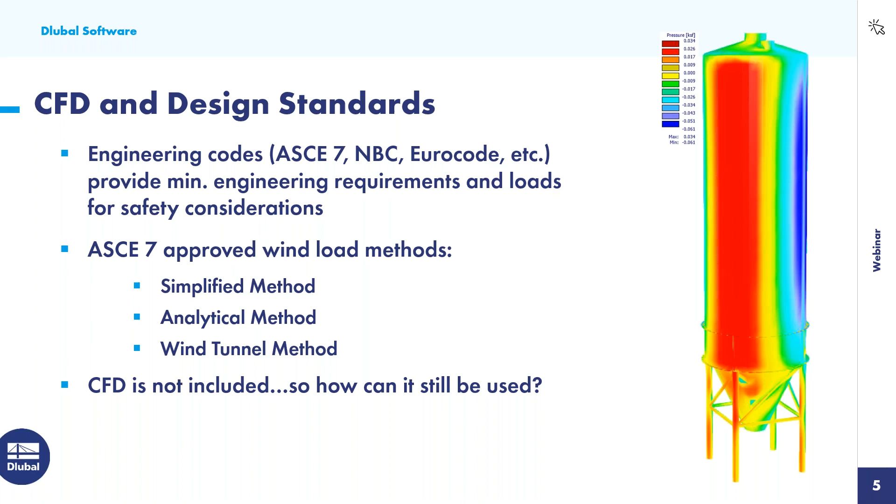So we might be wondering, how can it still be used while abiding by the standard? On this next slide, I want to lay out a few benefits and advantages we find when carrying out a CFD analysis. Essentially, a program like RWIND is a very cost-effective engineering tool for many useful applications. I put a lot of emphasis on the word 'tool' here because we're by no means suggesting this program should take the place of the requirements within the standard.

So how can we use this in addition to the standard? We know codes such as the ASCE 7 and NBC only provide minimum wind loads. It could be that in certain scenarios we need to increase these loads due to special cases, primarily for complex structural shapes. We can also use CFD for structures that fall completely outside the standard with no minimum guidelines to follow. The code is certainly very clear on many types of structures, but when we get outside these provisions, we're making a lot of guesses and assumptions. So we can use CFD to ensure those guesses and assumptions are correct.

We can assess the varying wind loads very early on in the design process. We can simply take our structure, put it in this numerical wind tunnel, and adjust that design again very early on based on these applied wind loads.

A program like RWIND can also consider the surrounding terrain and object consideration. So if we have very complex hills or adjacent buildings, which is what we'll take a look at today, these are all going to affect the wind flow. Now, there are certain coefficients within the standard, but these are all generalized, so if we wanted a more in-depth study of wind analysis, we could do so. We can also determine occupant comfort with the applied wind loads—looking at our structure, what it's going to be used for, and whether occupants inside will be comfortable with these wind loads.

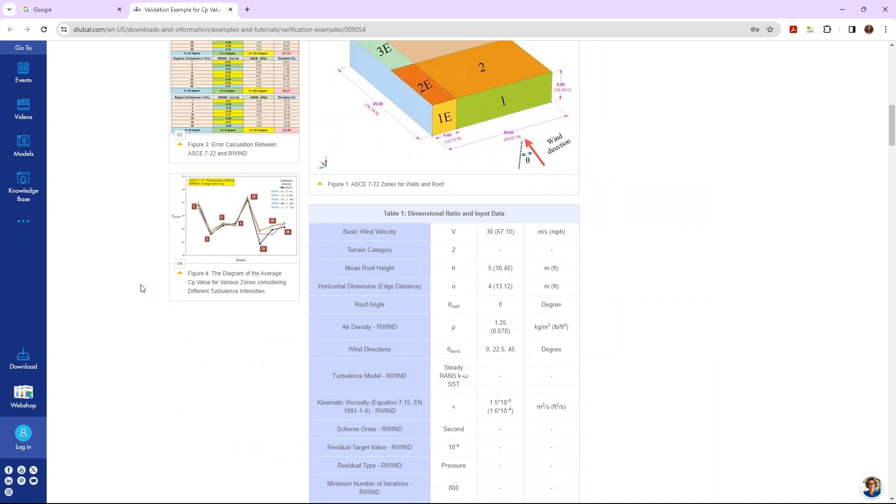The first example, if we click on it, compares the ASCE 7-2022 standard with RWIND for a general box type structure. We thought it might be interesting to compare these two to see how the RWIND results match up to the code standard. You can see the output and the deviation within this table as well as in graphical format.

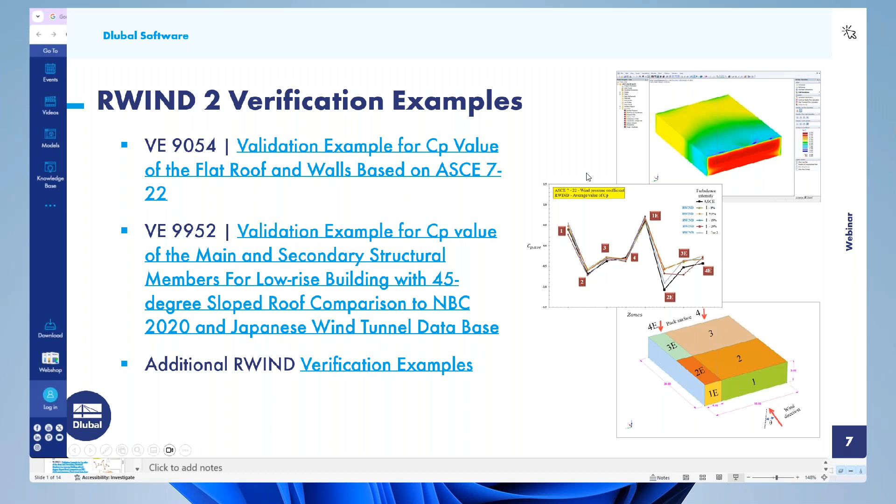In a similar manner, we also have a verification example with the NBC 2020. Taking a look at this particular example on our website, you'll notice this is for a dual pitch roof. We're also comparing the analytical calculations from the NBC to our RWIND, but this one was also carried out in a true wind tunnel test in Japan.

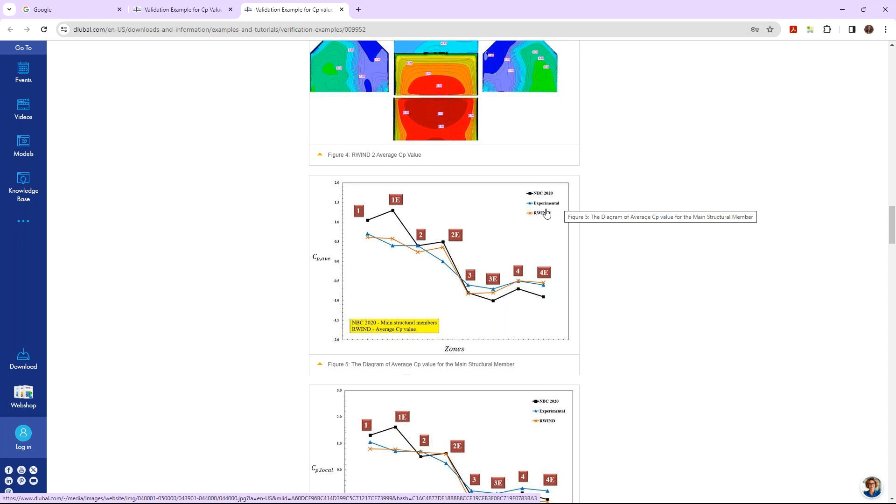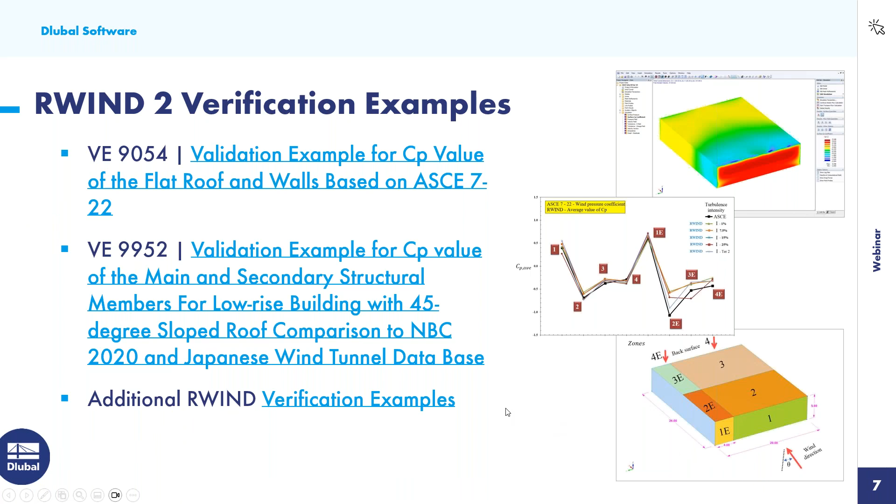So with this verification example, if we scroll down, we will see those three methods compared in graphical format: the NBC 2020, the experimental wind tunnel, and RWIND. We have many more verification examples available on our website, comparing to Eurocode as well as other analytical calculations, which you can access with this third link.

We're only going to be focusing on the steady flow for today's presentation, but if you are interested in the transient flow, I did carry this out in a previous RWIND 2 webinar that you can find on our website and our YouTube channel.

Now we'll take a look at several of the new features that we have released within RWIND 2 in the past several versions. And I'll preface that each one of these features here we'll actually be looking at in our example today. So we'll begin with the wind tunnel size. We offer now new scaling options.

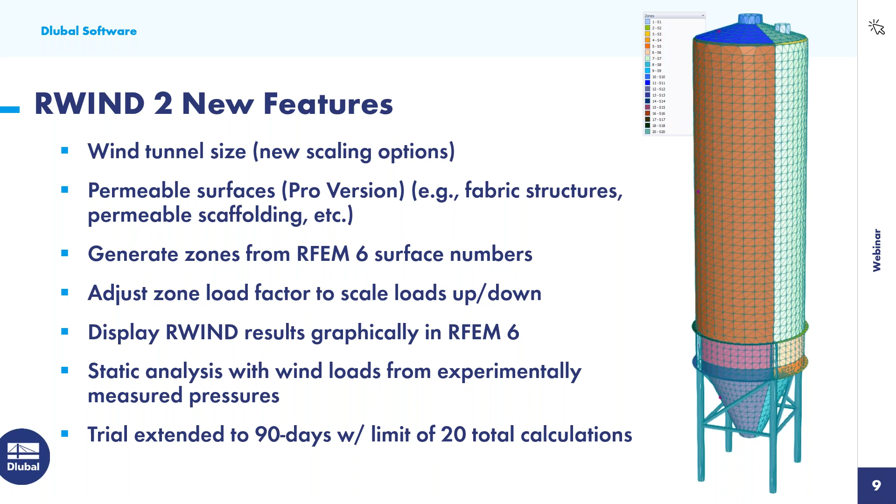Okay, so let us begin in our FEA program, RFEM here. And we can use RWIND as a standalone program. So I do want to make note of that, but for today's presentation, we will be integrating the structure into RWIND and then integrating those wind loads back into RFEM.

For those of you who have joined us for webinars before, this structure may look familiar. I did a previous webinar on the silo structure design where I fully modeled this structure. I carried out the analysis and the design of the members according to AISC, as well as a general stress design for our surfaces. So we won't get into that portion today. We're only going to focus on the wind analysis, but you can certainly take a look at that webinar if you are interested in that.

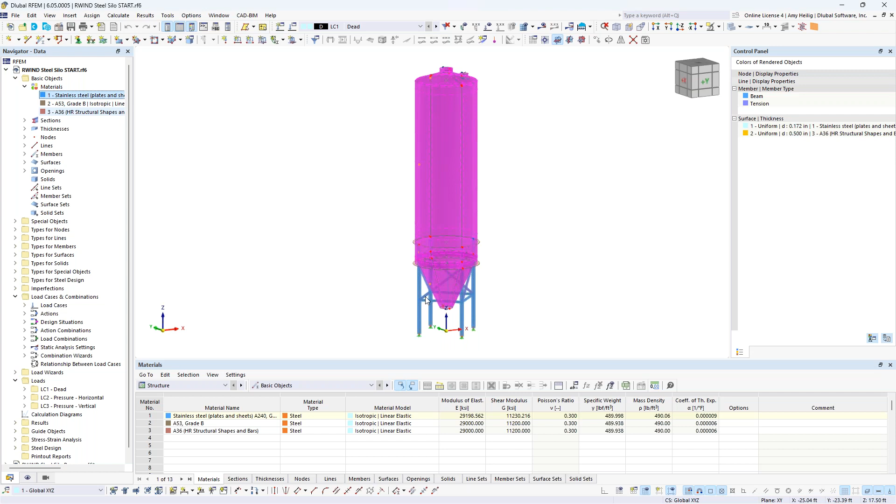So let's take a look at a quick model review though. So going to our navigator here, we have our silo structure, and you can see these surfaces are defined here with stainless steel. We also have A53 grade B pipe members supporting the structure at the bottom. And then we have a couple ring beams, A36 material, as well as these channel sections spanning in between the ring beams.

Now, in the previous webinar as well, I had also applied various loads. So we have 3 simple load cases for today. The dead load is only going to include the self-weight, so no additional loads applied here. However, if we take a look at the pressure in the horizontal direction, we want to account for some type of fill load inside of this silo structure. So you can see that outward pressure along the body of the silo up here close to the top, but not quite to it. And then as well as in the hopper, we also have a friction load here for, again, that fill. So it's going to be in the downward direction along the full height of the hopper as well as the full height of the silo.

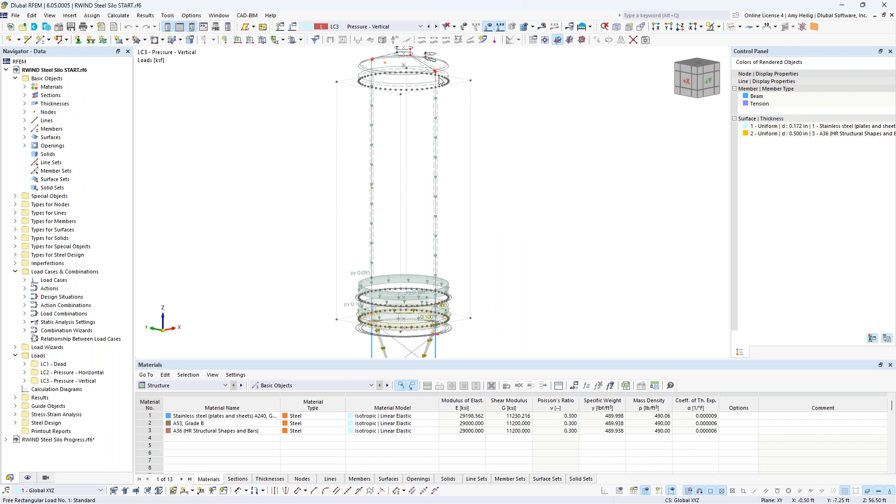So now we want to begin with our wind load. And when we go to the base data, which we could right click on the model name to access that dialog box here, or we could access it within our quick tools. This would be the dialog box that pops up when we first create our model.

But we can revisit it here under the second tab to take a look at all of the various add-ons available. So again, for those of you not familiar with RFEM, we do work with this add-on concept in the sense that RFEM is the base FEA program that provides the modeling, BIM integration, and the full analysis. But if we want to take it a step further and carry out the steel design according to AISC or concrete design and so on, or advanced analysis like dynamics or stability, we would need these add-ons. So you create the package that's specific for your design needs.

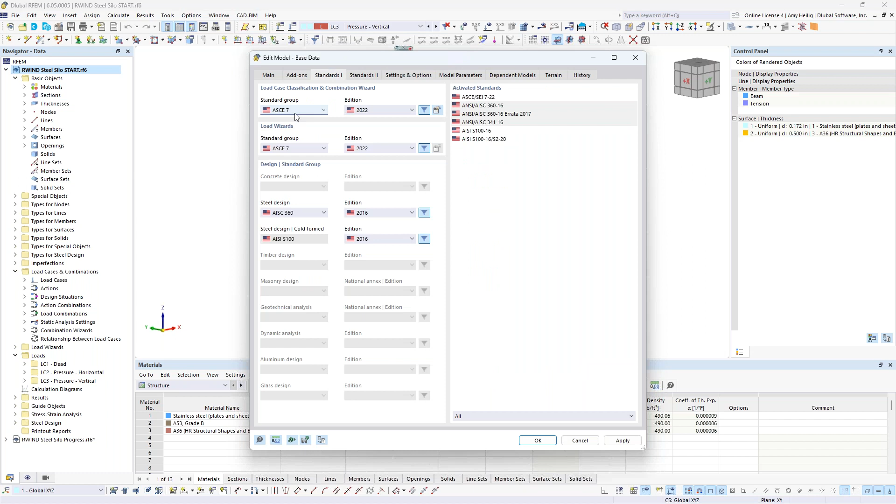But you'll notice here that we also have wind simulation. So this is telling the program that we now want to integrate this model with the standalone program RWIND. Under the third tab, we will generate our load combinations automatically according to the ASCE 7, the 2022 standard, but more importantly, specific to our wind. We will generate our wind load profile according to the ASCE 7; the 2022 standard is available. We also have the NBC 2020 standard available, as well as many other international codes here.

Now, if we want to carry out the steel design, again, we won't be getting into that today, but the AISC 360 is available, or the AISI standard. 2016 is currently released in this version, but we do plan to release the 2022 in the next few weeks.

So once we have this information input, we want to go into our load cases and combinations, and we will generate our first wind load case here, load case number 4. And we'll give this the name wind with the action category set to wind load based on the ASCE 7. Now I could manually apply my wind loads here to the structure, and in that case I would keep the analysis type set as static, but because we have enabled our wind, we now have the wind simulation option available. And this gives us 2 additional tabs here up at the top.

So moving to the second tab, we want to input the wind simulation analysis settings. This is what is going to be used in RWIND, but we have the ability to set this here within RFEM. So we do have a default definition set that we can simply modify, or we can create multiple definition types with the option down here in the lower left. The simulation type is going to be set to steady flow. Again, we covered this in the PowerPoint that if you do have access to the Pro version, you can also run the transient flow.

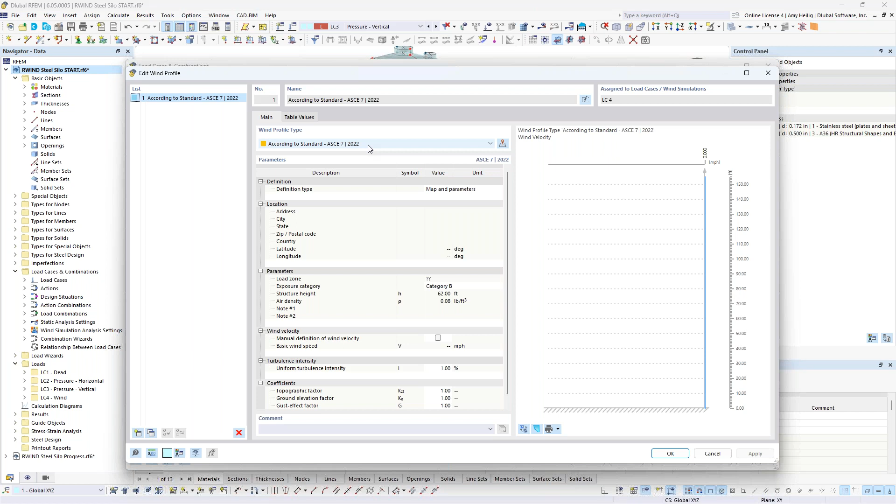Now, the additional tabs, such as the advanced, you're probably not going to make too many changes here unless you're an advanced CFD user. So once we have this input, we now move on to the wind profile. So what is the wind speed entering into this numerical wind tunnel? And you can see once again that we do have a default option set here according to the ASCE 7-22, because that is what we set in our base data. Alternatively, we can use this option here for user defined. So no longer are we referencing a specific code, but you can manually input the wind velocity here as a function of the tunnel height, including the turbulence intensity.

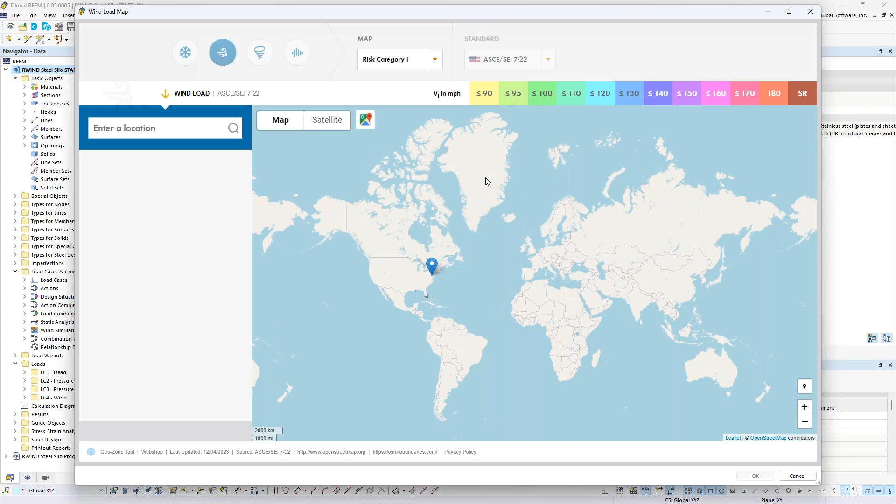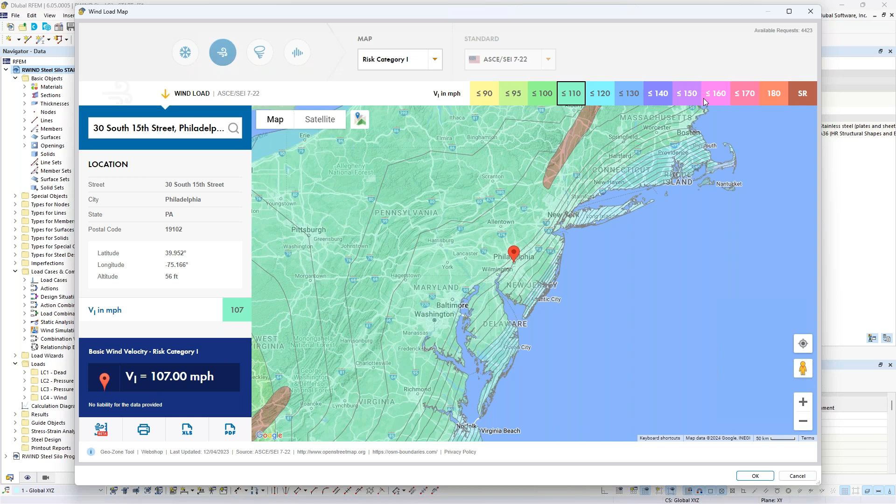So we'll go ahead and use the ASCE 7 for our example today, and then we have two additional options here, including the map and parameters. What this allows us to do is to access what we call our Geo-Zone Tool, which is available on the Dlubal website, where we have taken multiple standards all over the world and integrated them with Google Maps technology. So specific to the ASCE 7 here, we would select our risk category. We could toggle here to Google Maps directly, and we could input the direct address, or we could click on the map. So just choosing here the address of our Philadelphia office, and we can zoom in here. We can see that the ASCE 7 has set this basic wind velocity for risk category 1 at 107 miles per hour. We can click OK, and all of the location and the wind velocity will directly be imported for this wind profile.

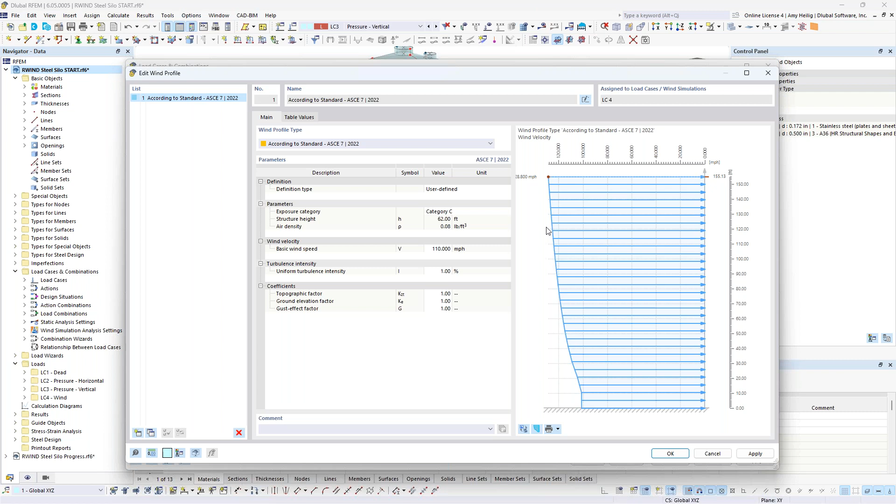Now, alternatively, we can choose the user defined, where we just simply type in, let's say, a basic wind speed of 110 miles per hour. Now we can make modifications to the exposure categories, such as C. We also have additional information that we need to input, such as the turbulence intensity, but also these factors that are specific to the ASCE 7 that are all going to affect the wind velocity here at the start of the wind tunnel. So now we see as a function of height and miles per hour what that wind speed will be. I can toggle here, and we can see a better view of exactly the information that we're setting here.

So now that we've input this information, we also can input the wind direction. And this is all based on the global x-axis. So if we have this set to 0 degrees, the wind flow is going to move from left to right here on the structure, in the positive x-axis.

Now we'll get to a little bit later on some alternative options here. We'll also discuss the experimental data at the end of our presentation today. So finally, we have our wind tunnel. Again, the program has optimized these. We do have the ability here in RFEM to manually adjust these individual inputs for the wind tunnel size.

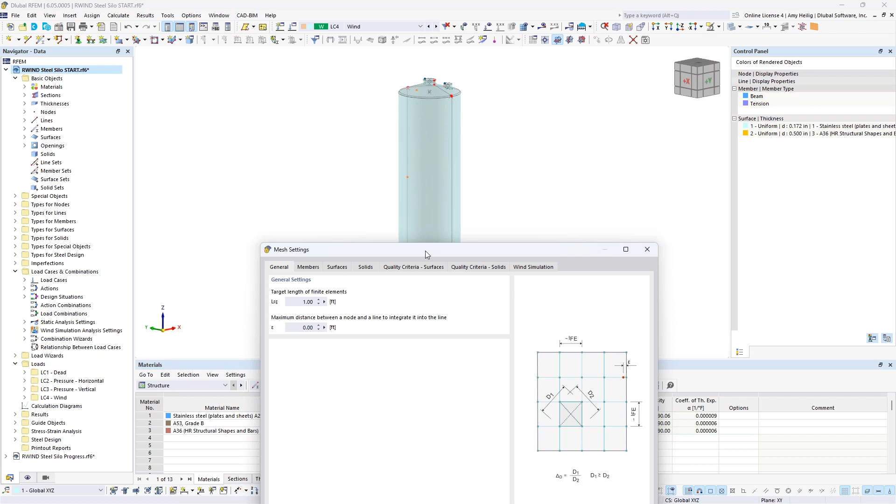Now, before we are able to run this within RWIND, we do want to take care of one more additional setting under Calculate Mesh Settings. So this is typically where we would input our information for our FE finite element length within RFEM itself, and some additional options here. But we also have a wind simulation tab and some additional options here that are specific to what we call our shrink wrap mesh that is always needed with this CFD analysis.

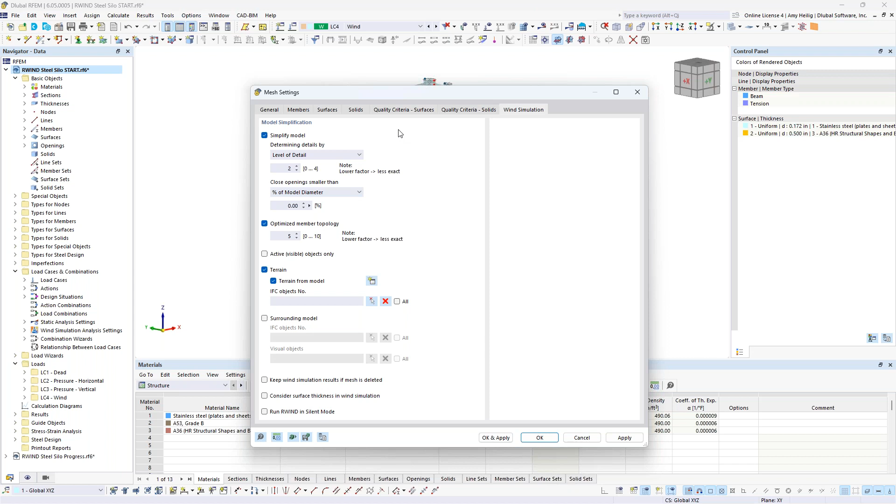And I'll show you that once we get into RWIND, but these specific settings here are going to control that shrink wrap mesh, including the level of detail. So a scale of 0 to 4, the higher we set this, the more detail we will take into consideration. What this means is, do we want this shrink wrap mesh to take into account every single little geometric detail here of our structure, or do we want to simplify? So this is set by default to 2.

We can also close openings. So we can essentially not allow wind to flow through certain areas of our model. So down here at the bottom, we certainly want the wind flow to move through these areas, but I could close them if I prefer. What would probably make a bit more sense with this is something like open doors or open windows. We can use that shrink wrap mesh to close those openings so that wind flow is not allowed to move through the interior of the structure.

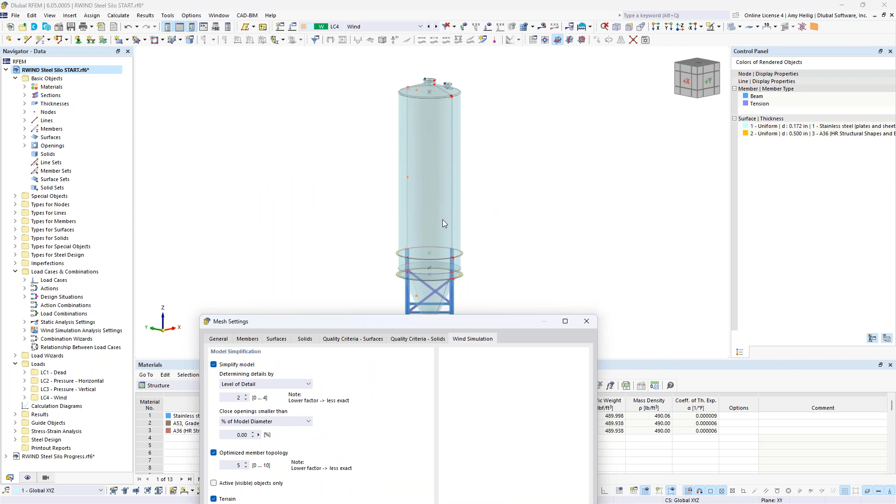It should be known though that if you choose to close these openings, the shrink wrap mesh in RWIND is not going to distribute those loads to the adjacent elements. If you do want to take that into consideration, you should apply another surface element in RFEM. For example, we have a surface load transfer that's purely used as a surface element to transfer loads to adjacent objects without adding any stiffness. So plenty of resources on that in previous webinars and on our website.

The optimized member topology, for example, if we have a W section, do we want this shrink wrap mesh to account for all of the flanges, the webs, that geometry exactly, or do we want to simplify a bit further with more of a box type structure? So again, the default here is set to something kind of middle of that scale.

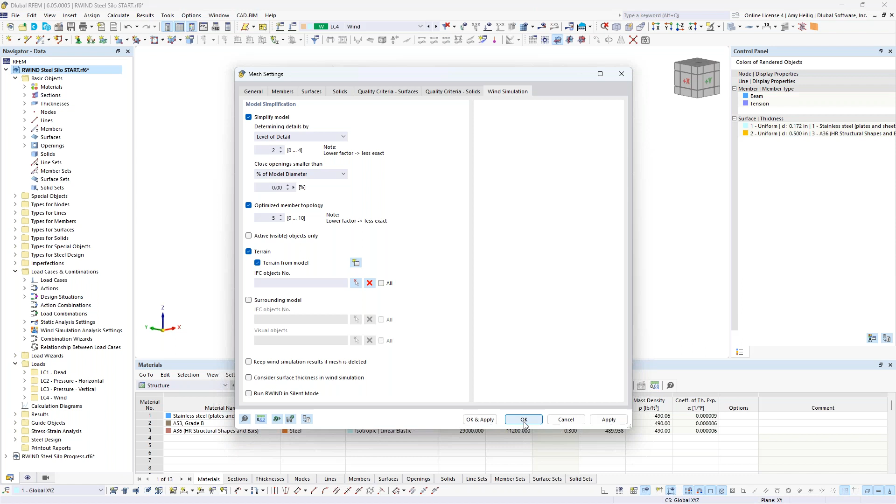Down here, the keep wind simulation results if mesh is deleted. This is really helpful in the sense that if we make very minor changes to our RFEM model and the mesh here in this program deletes, we won't necessarily lose our RWIND results that could take several minutes depending on the complexity of the structure to run. If you make any major changes, though, you should use this option quite carefully, in the sense that with any geometry changes, the wind analysis should probably be rerun. So just keep that into consideration, but when we're swapping out materials or something, this can certainly be a useful feature.

Okay, so now that we have all of this information input, we can go to calculate and we can open up RWIND directly here. So notice that the program is going to calculate the FE mesh in RFEM, and that's because our shrink wrap mesh, once we get into RWIND, does correspond with the FE mesh in RFEM so that we can bring back those wind loads and apply them to the structure here in RFEM for the static analysis and design.

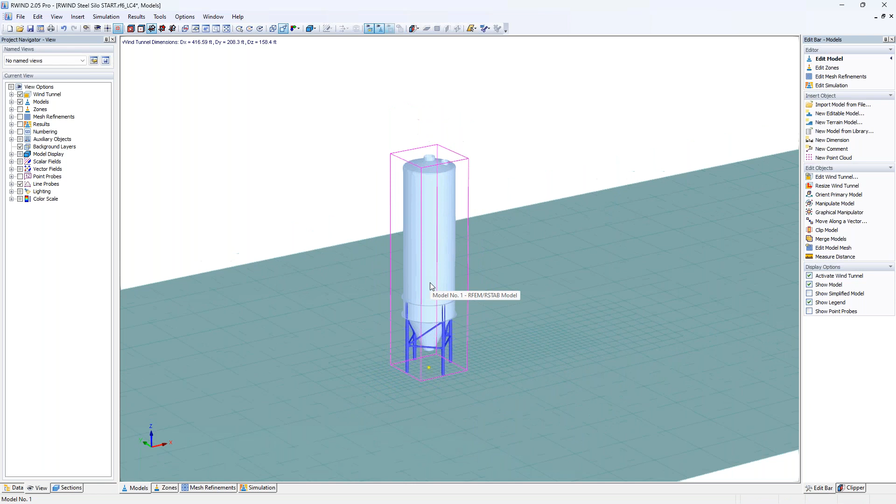Okay, so once this program launches here, what we should see is our silo structure brought into this numerical wind tunnel. So we'll cover a little bit of the input here first before we run the calculation. So sure enough, here is my silo structure. Again, only the geometry is needed. It's brought into this numerical wind tunnel. We're not really caring much about materials and stiffnesses.

You'll also notice in the wind tunnel itself, as I mentioned, that mesh density, it's pretty coarse out here, but as we move closer to the structure, it's a bit more refined. And this is essentially the mesh that's occurring throughout the length, the width, the height of this tunnel.

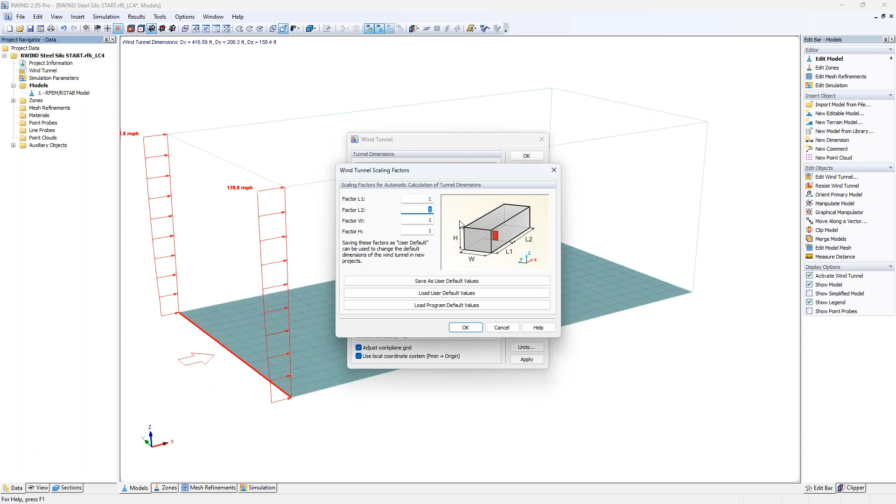Now we talked about the new scaling options for this wind tunnel. So here in our navigator tab, we can double click this wind tunnel and we have added this scaling factors option here. So now, for example, if we know our model is not converging with the simulation, we need to add some additional length within our wind tunnel behind the structure, which would be L2. We can add a factor directly in here, such as 2.0.

So when I click OK, the program gives me a warning saying I must also click the Adjust Automatically button. So we do so here, considering the model standing on the ground. And when we click OK, we should now see that wind tunnel extended by a factor of 2. So this allows us to quickly make changes to that wind tunnel rather than manually adjusting each input individually. We'll go ahead and click the Undo button. We want to keep that wind tunnel as the default size.

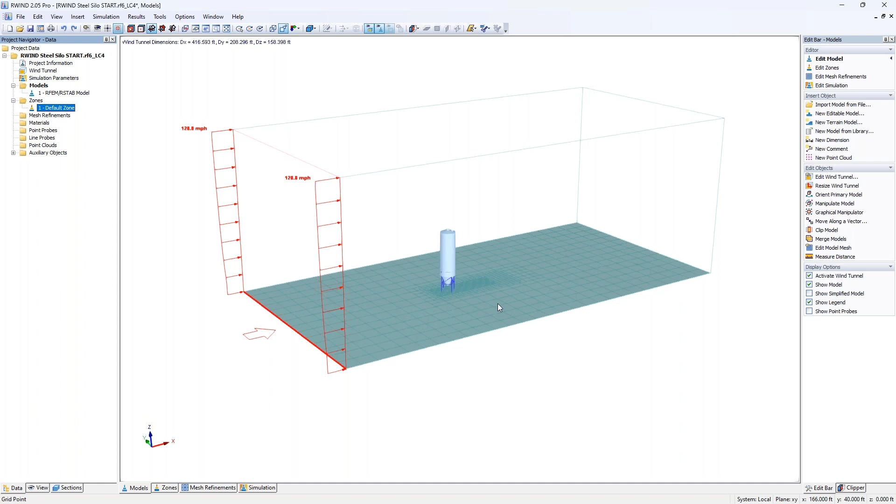You'll also notice that wind profile that we have set according to the ASCE 7 is shown here along with the magnitude, and that wind flow will move from left to right. So we also talked about in the PowerPoint the option for zones. So currently under the zones, we just have one option, and that's the default zone, which is going to include this entire model. Now, previously, if we go here to this second tab and I zoom in, we used to have to create these zones manually within RWIND itself.

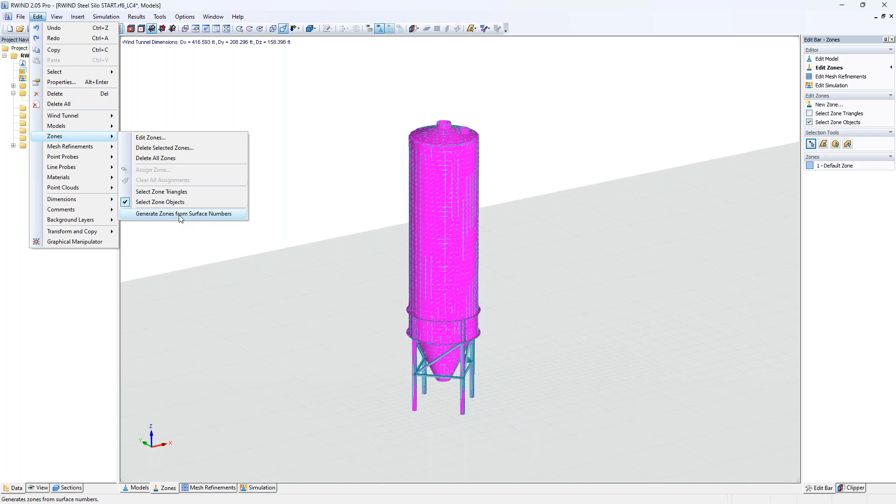So now under the option edit, and we have here zones, we can generate the zones from the RFEM surface numbers automatically. So notice now all of these zones have been created here, and I can toggle through them, and I'll actually also turn off here the mesh edges so you can see this a little bit more clearly. But every single zone is going to correspond with the surface number that we have set within RFEM itself. So ultimately, obviously, this is used to subdivide the model into parts, but also to assign specific input properties.

So for example, graphically, I can choose one of these zones here, double click on it, and we can assign a new material. So when I create a new material definition type, I can apply those surface roughness input options here. We previously saw this option in RFEM as well, but it was applied to all surfaces. But now that we're within our RWIND, we can apply different surface roughnesses to each individual zone or surface.

Additionally, if you have that Pro version, you can consider the surface permeability. So we have the Darcy coefficient, inertial coefficient, and the porous media length to allow some of that wind flow to pass through the surface. Now, also after we are done, we will also use these zones for result interpretation like drag forces.

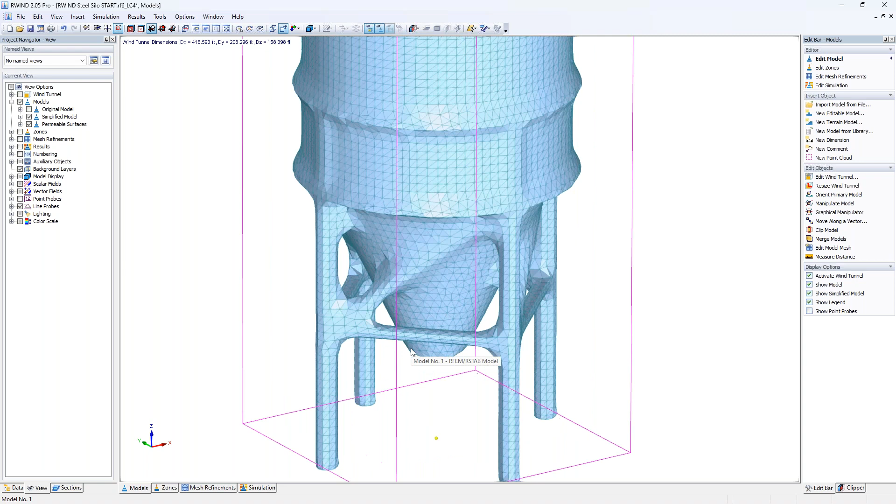Going back to the model here, I also would like to take a look at this shrink wrap mesh. So we'll go ahead and activate it here under the simplified model. I'll turn off my wind tunnel, and zooming in here, you can see that again, the program has created this shrink wrap mesh automatically for us. And this is truly the huge advantage of our RWIND, is that when you're carrying out a CFD analysis, it is required that you have this shrink wrap mesh, and ultimately it can be really time consuming to create this simplified model from our more complex RFEM model. But the program is doing all of this automatically for us. And again, it's needed in that CFD calculation with that OpenFOAM solver.

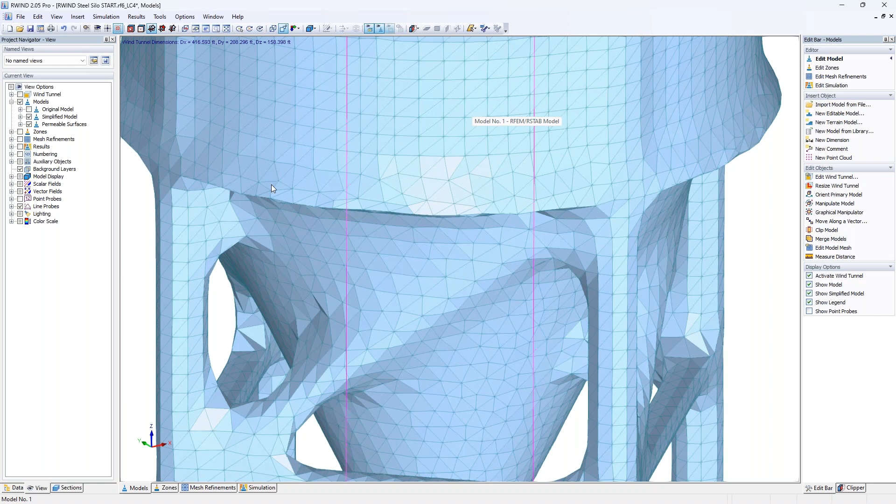It's also correcting any mesh errors automatically. So you'll notice that if we zoom in here, we have triangles everywhere that have to intersect perfectly with the adjacent triangle. So the program has taken care of all of that for us. It has closed a lot of these open edges. It also has deleted or simplified any unnecessary detail. Now, again, this all depends on those settings that we set back in RFEM, or we can control them here in our RWIND. You can see that there's certainly some simplifications going on here, but again, that's going to speed up our calculation time a bit rather than waiting longer with taking into account more of those details.

So we are now ready to run the calculation, but rather than waiting for this to run, I'm going to go ahead and open up an already saved model. So when we run the RWIND calculation, we would jump to the simulation tab here, and the run calculation option would be available.

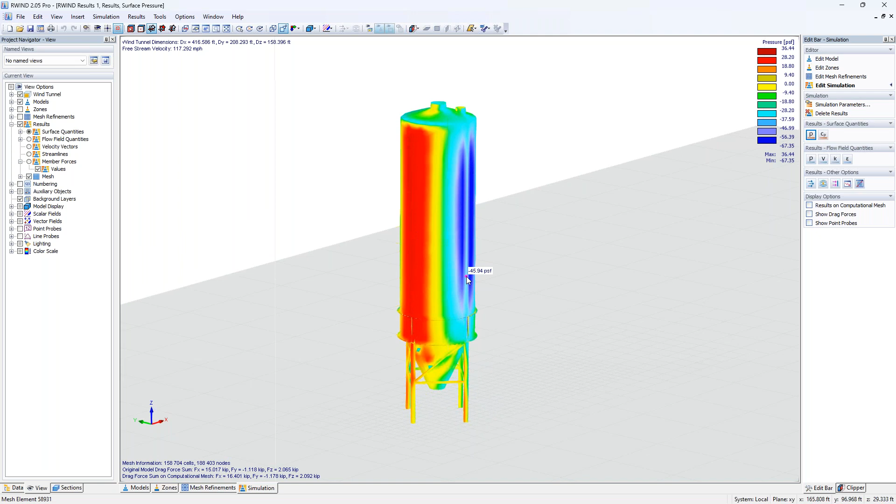Once it's done, we're now presented with our results here within RWIND. We're initially presented with the surface pressures. Viewing the surface pressures, we can move our mouse around and see the magnitude directly given, with pressure acting perpendicular to the surfaces. When we rotate this around, we may see higher suction forces denoted by a negative value.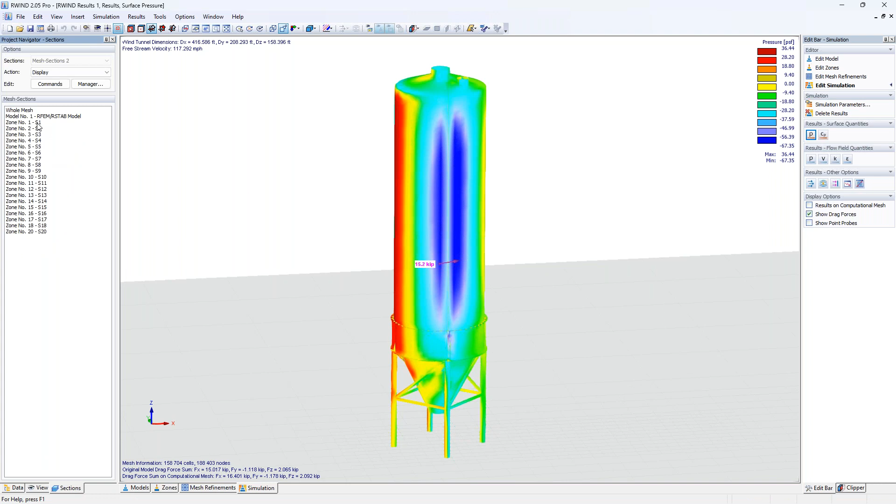We can also activate the drag forces. So the drag force total for the RFEM model is shown at 15.2 kips, and we can see this shown graphically here. But under these sections, this is where we can also take advantage of those zones. So notice zone number 1, which is my members only, this drag force updates to show me only the forces for these relevant sections.

Now we could continue with some of these various zones, but perhaps I'm interested in both zone 7, and holding down my control key, zone 16 for the body of the silo structure, and I see my total drag force here as 10.6 kips. Okay, so we'll turn off those drag forces and go back to the full member model here for the pressure.

We can also take a look at the pressure coefficient factors, and these represent the relationship between the static pressure and the stagnation pressure. So again, these contours shouldn't change from our pressure, but our magnitudes here certainly will.

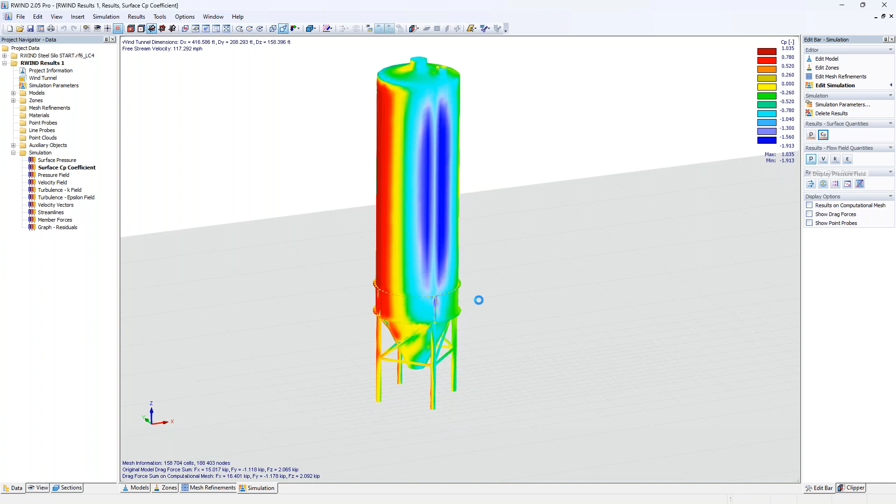We then can view the pressure in and around the structure. When we look at this option, you'll notice we have this slicer directly through the wind tunnel. Under this clipper tab, we can change maybe in the X direction or any of the other planes available. We can also slide it from left to right to see those wind pressures changing, and use our mouse to view those magnitudes around the structure itself.

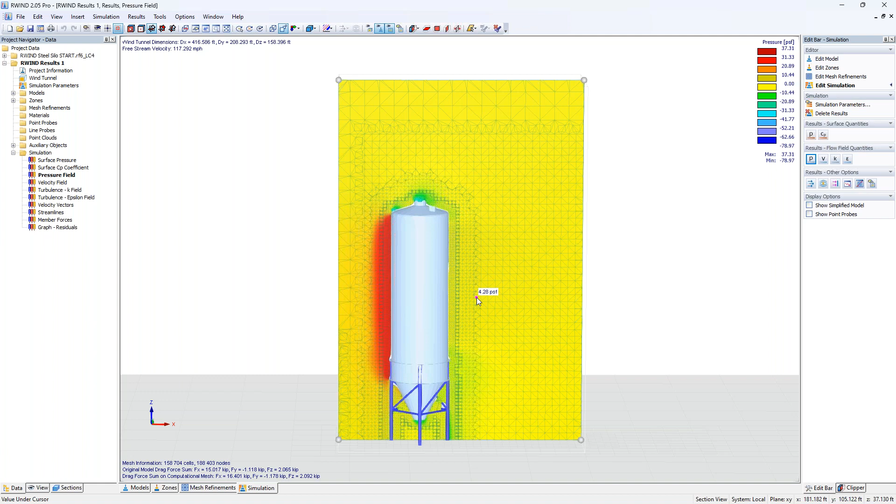Same concept here for the velocity field. We can actually view the wind flow velocity in miles per hour in and around the structure. Then we have two additional options related to turbulence. The first option shows the turbulence with respect to kinetic energy, again showing the magnitudes here. Our epsilon shows the results of the turbulent energy dissipation.

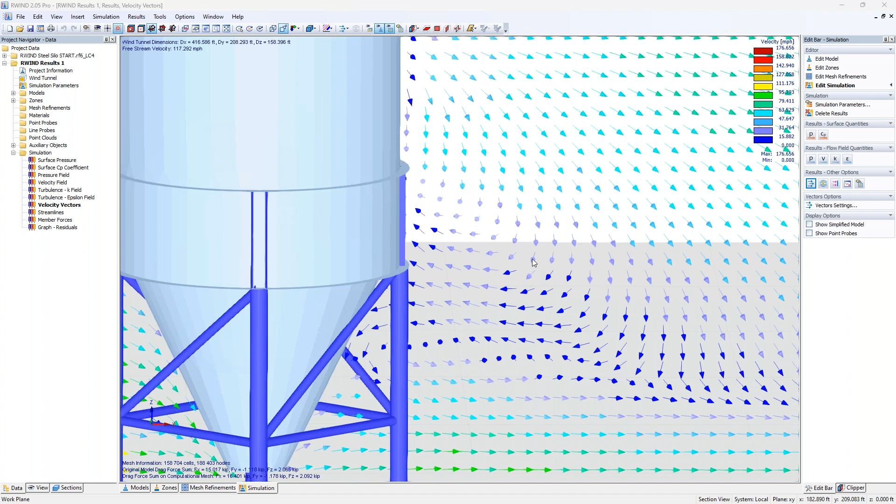So moving on to the additional options under other options, we have our velocity vectors. This allows me to zoom in and actually see the magnitude and direction of these velocity vectors and how they'll essentially affect the structure. We can see how the velocity is either moving toward a structure or when we have that particular suction force.

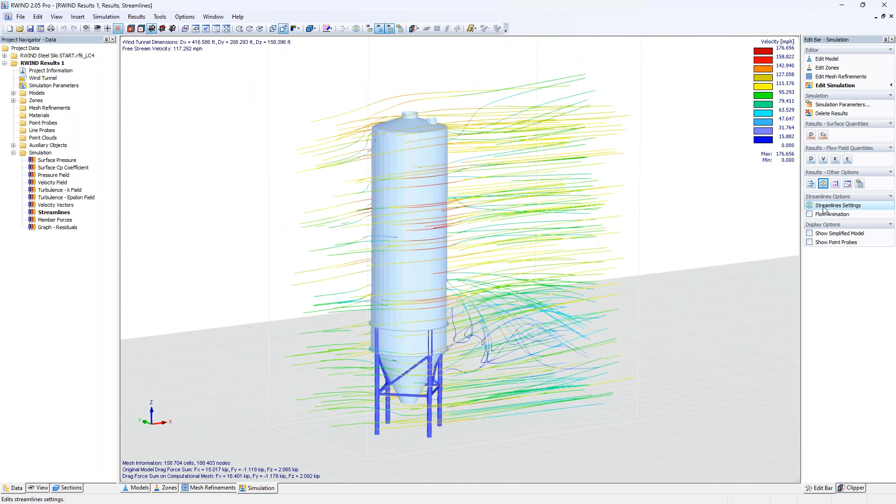And finally, we have our streamlines. This shows the particles that allow me to study the airflow as it moves through this tunnel, and we can adjust the streamline settings here. Under the drop down at the top, we can change this to a segment, to a rectangle, or currently we have it set to a 3D box.

Additionally, we can rotate this around and graphically make modifications to the size of our 3D box. If we wanted to set that to something more narrow, we could rotate it. Once we click OK, this will adjust those particles and we can activate the flow animation, which is helpful in studying those airflow particles as they move around our structure.

Under tools, we can create a video file, so you can save this MP4 file to your computer. Again, this is something that could be really beneficial in something like a digital calculation package that you're submitting to your client.

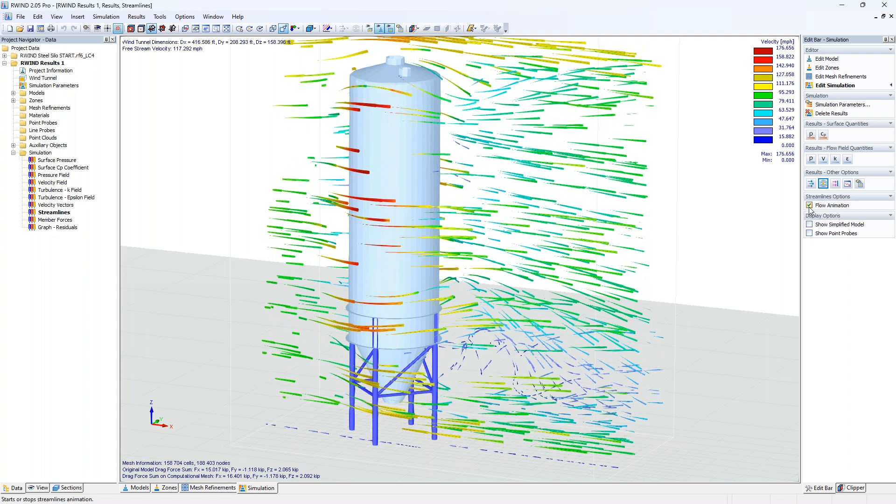Okay, so moving back to the pressure, we also have the option called point probes. When I right click here to add in a new point probe, I can set these graphically and click on various areas of my model here, including the members or maybe the backside to see these suction values.

You'll notice that when I set these point probes, they are now stationary. This allows me to view the pressures at particular points, or I can toggle to the pressure coefficients. Again, those magnitudes will change, but these point probes are always available within the model. We can turn them on or off with this checkbox shown on the right. In a similar manner, we also have what we call line probes.

So I can right click here to create a new line probe. But if I try and set this graphically, the program gives a warning saying it can't be set graphically, and to please use this alternative tool.

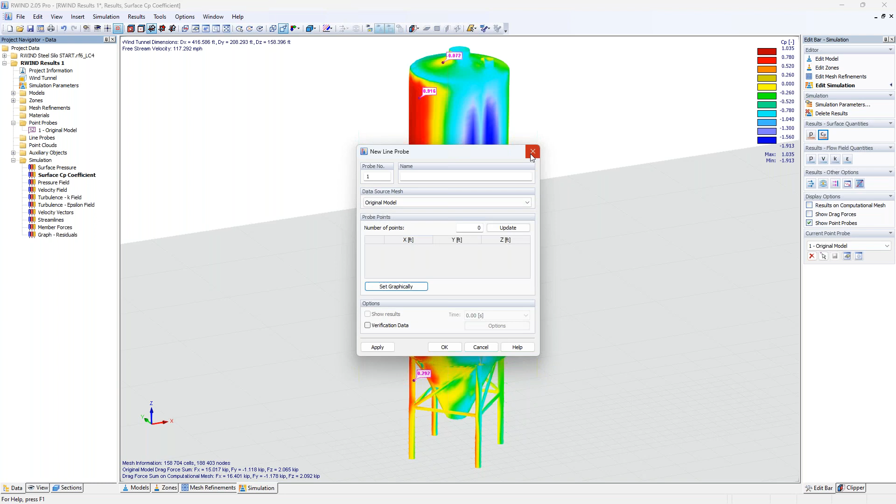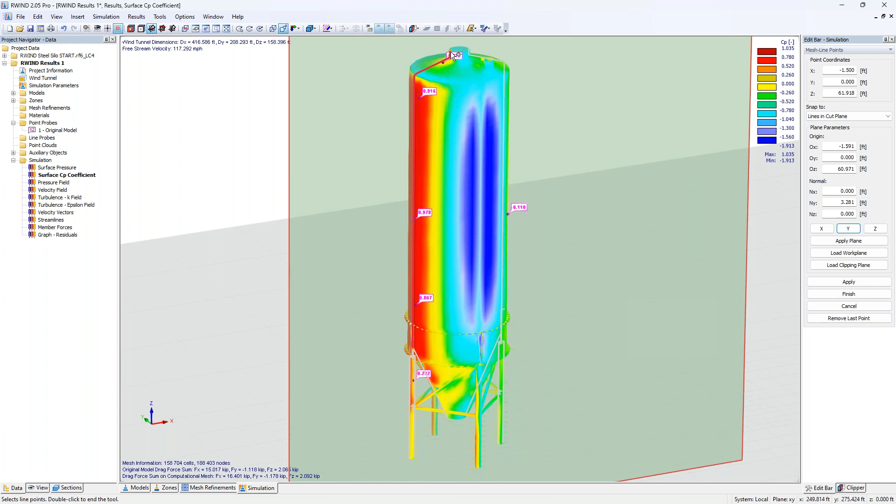This tool resides over here, where we can graph along the line probe. Notice we're making a slice through the structure. We can change our slicing plane and set an offset if we'd like. We can click on several locations with our mouse, creating this cut right up through the center of the structure in the vertical direction, and when done, double click.

I want to toggle back to our pressure as a function of length for that line probe. Now we see an alternative line here - this is our internal pressure, maybe not something we're so concerned with, but we can view this pressure along this entire height.

When we save this, it's now saved as a line probe that we can always access for any future results within the line probes tree option.

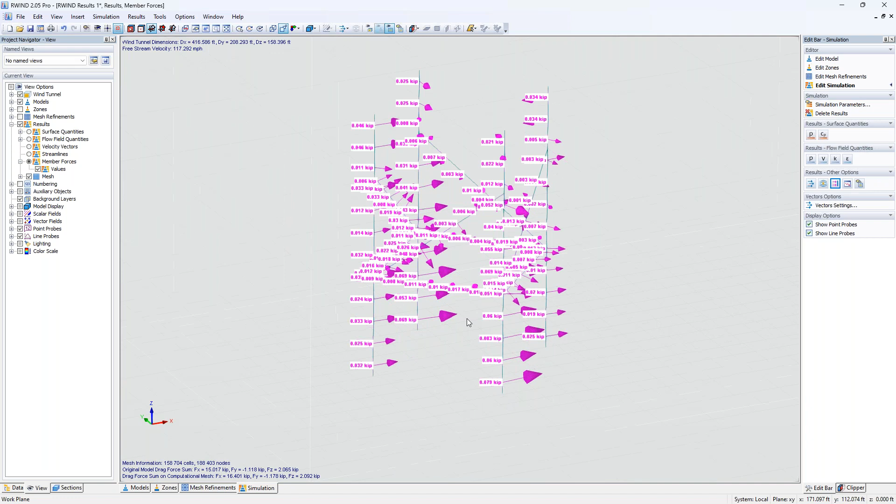I also wanted to point out, under the View tab, if we take a look at our results we can activate the member forces. We're looking at wind pressures on the surfaces themselves, but remember we have all these members supporting the silo structure at the bottom. These member forces are given in KIPS. This is the information that will be taken back into RFEM and applied as concentrated loads for the static analysis.

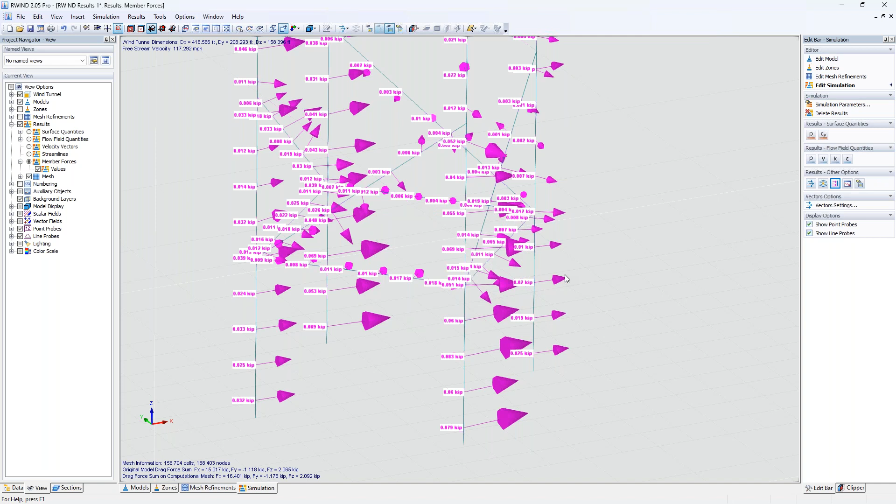Now that we're done reviewing results in RWIND, we'd exit the program and go back into RFEM. We'd want to save our results, which will bring those wind pressures into the model.

I need to open up an already saved model for my load case number 4, and run the static analysis for this load case. I've already done so, so I can just view the results - it solves quickly since we already have our wind pressures brought back into the program.

One feature we've recently added, once you run this calculation, is this toggle now available in our navigator, in the 4th tab under results, called wind simulation analysis. This allows me to view the wind pressures directly in RFEM itself, as well as pressure coefficients.

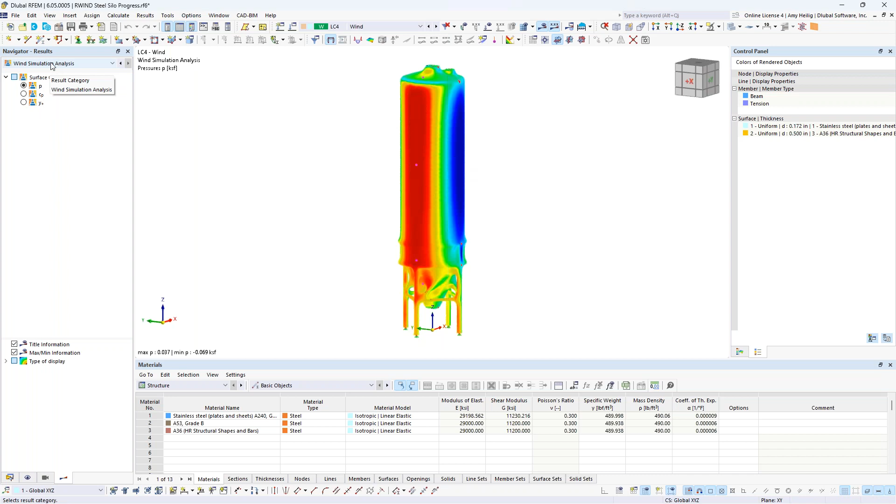So technically I don't even need to open up RWIND at all. If I prefer, I can run this calculation silently in the background and then view these same pressures directly in RFEM. Now we've also carried out the static analysis.

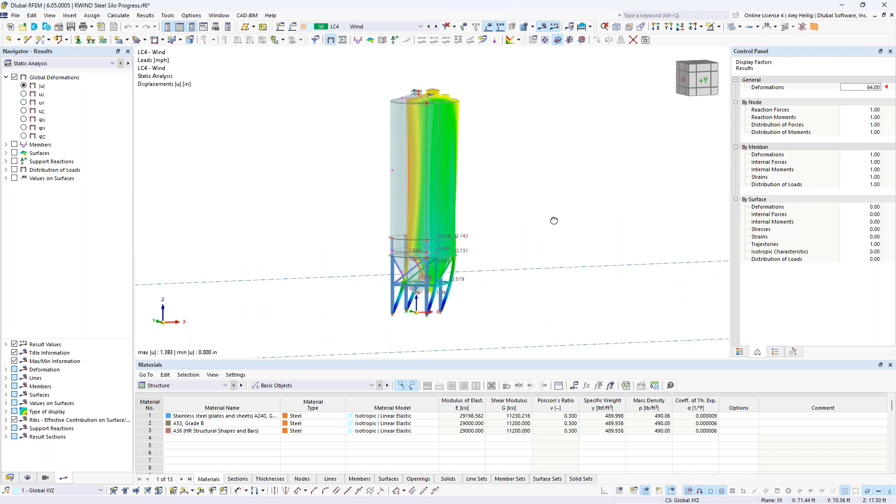So initially what we're seeing here is based on the wind tunnel, which we can view as the graphical load shown within the RFEM model, and the deformation of this silo structure. If I increase the deformation factor, just as we'd expect, we're seeing this structure deform from left to right based on this applied wind load.

What else we can take a look at are the member internal forces. We can activate the members and view axial forces, bending moments, shear forces. Taking a look at the axial forces in particular, as we would expect, we have a high tension force for this column up here at the front of the wind load, and our 3 additional columns here are in compression.

We can view the results of these surfaces by activating our option here, so we can view the internal forces or the stresses, such as the von Mises stresses. If we zoom out, we can see relatively low stresses for this wind load - maybe the highest stresses are down here at the base of our hopper.

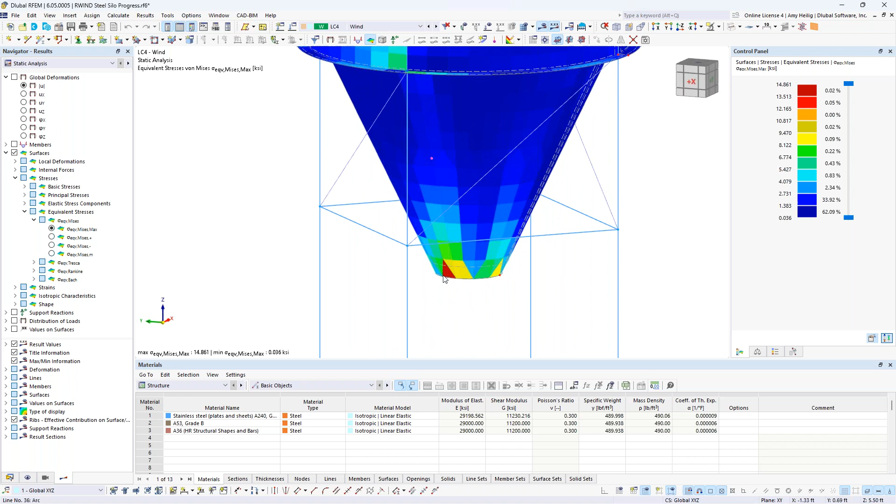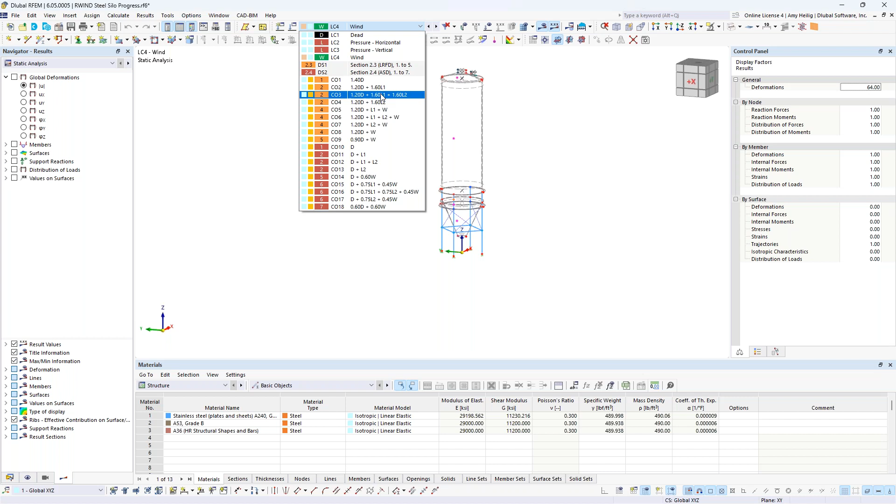Now that we have these results shown for this wind analysis, we'd want to further combine these into our load combination. Remember, we have these additional pressures for our fill, and we also have self-weight. The program has automatically generated these load combinations according to ASCE 7. We can take a look here, graphically showing the wind load with that fill pressure along with the self-weight, and we could run the full analysis for these load combinations.

This is also the point in time that we would probably want to carry out the design of our steel members, or the general stress design of these surfaces.

You can do so within our additional add-ons, such as stress strain analysis or the steel design add-on. Again, this is where you can refer to that other recorded webinar where I went into much more detail from this point forward with the structural design.

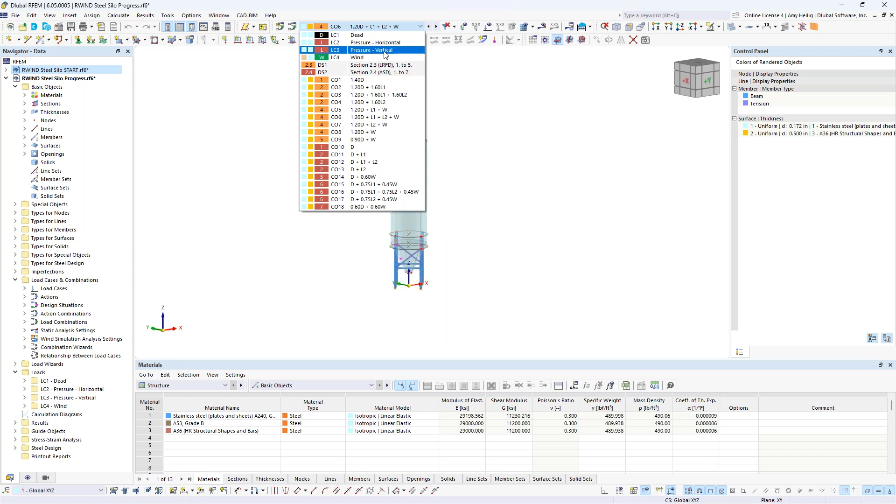Going back to our original load case for wind load, we applied this wind load based on the global x-axis, but in reality wind does not necessarily act from one direction. It can act from any direction, so we want to consider additional load cases here.

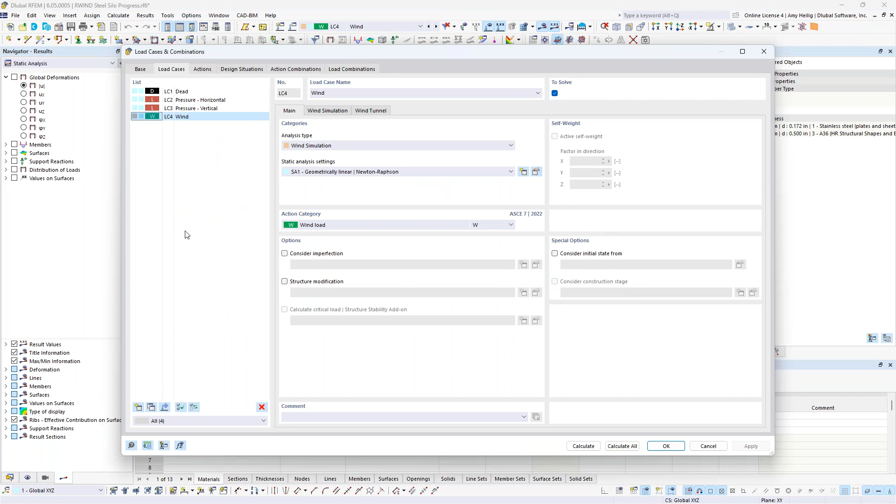We can do so by going back into our load cases and combinations, and directly make a copy of load case number 4. Notice that all the simulation analysis types, like the wind profile, were copied from the previous load case, but what we want to adjust is the wind direction.

Perhaps I want this to act at an angle of 30 degrees, so I input 30 degrees. The program will ask us to delete the results, that's fine. Let's go into a plan view, and now we see this wind flow, based on the global x-axis, is at an angle of 30 degrees.

This is certainly important, especially for unsymmetric structures. We want to take a look at the wind acting in all different directions, and you really have the freedom to set any angle you prefer. So we'd want to continue doing so with those load cases.

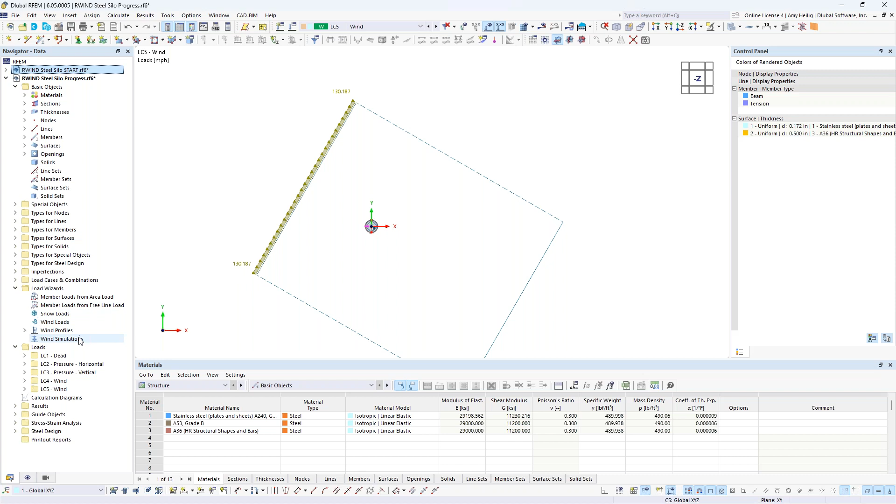However, I want to show you a user-friendly option for this load case generation. It's available in our navigator under the Data tab, under Load Wizards, and we have wind simulations here. This will actually generate those load cases automatically based on a specific step angle.

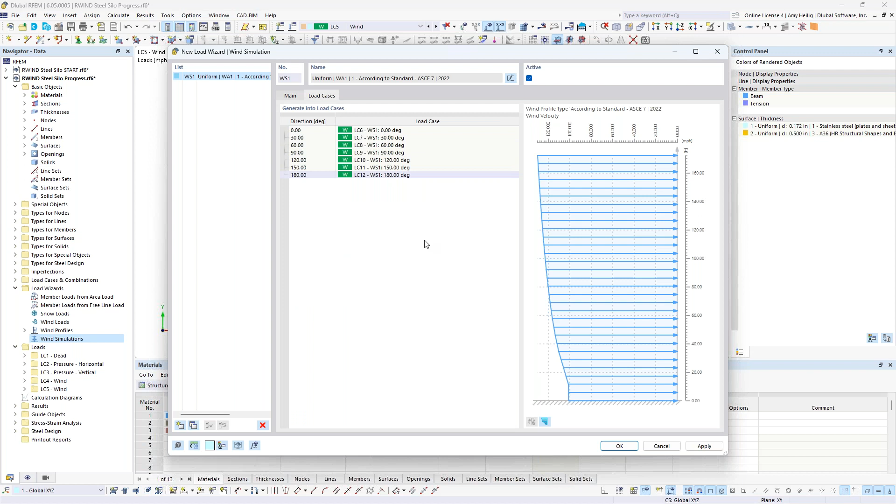I'm going to set this to 30 degrees, and I'd like the program to create these load cases from 0 degrees to 180 degrees. Now under the Load Cases tab, notice that all those specific load cases, every 30-degree increment, are automatically generated. So in our drop-down box we now have not only the 2 load cases we manually created, but also these additional load cases the program quickly generated for us.

Taking a look at these in plan view, we have 0 degrees, but as I cycle through these various wind load applications, notice that my wind tunnel dimensions are automatically updated for me. This is the information we'd want to carry out the analysis within RWIND. We could bring it back here into RFEM and notice that the load combinations were automatically updated as well to consider those different wind directions.

Going back to our original load case, another topic we'd like to discuss is adjacent objects. The code does have some coefficients or recommendations for when we have adjacent objects, but for anything more complex, we would want to take this into consideration in RWIND directly.

For my example today, I have this silo structure, and this is the structure I'm interested in designing, but there are identical silo structures placed very closely to this one that I know are going to affect my wind flow.

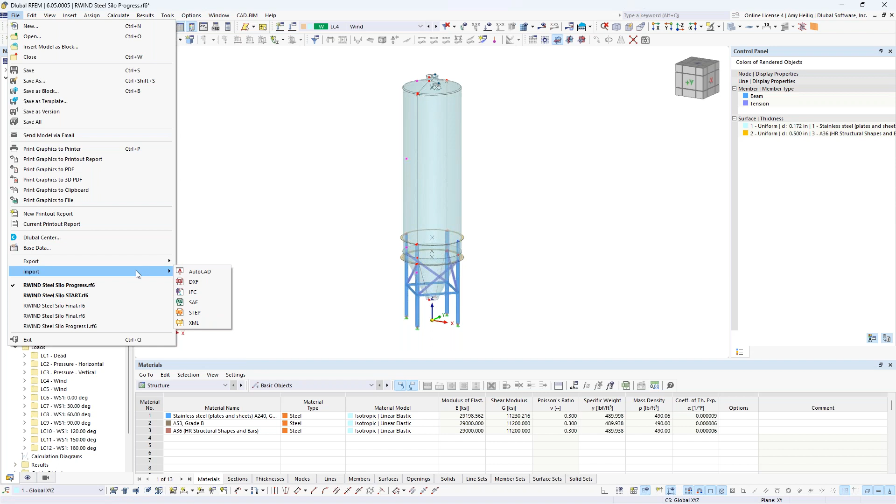What we can do here is take this model and go to File, Export, and I can export this model as an IFC file. I'll go ahead and carry that out, saving this IFC file directly to my computer. Then, in this same RFEM model, I can go to File, Import, and import that IFC model I just created.

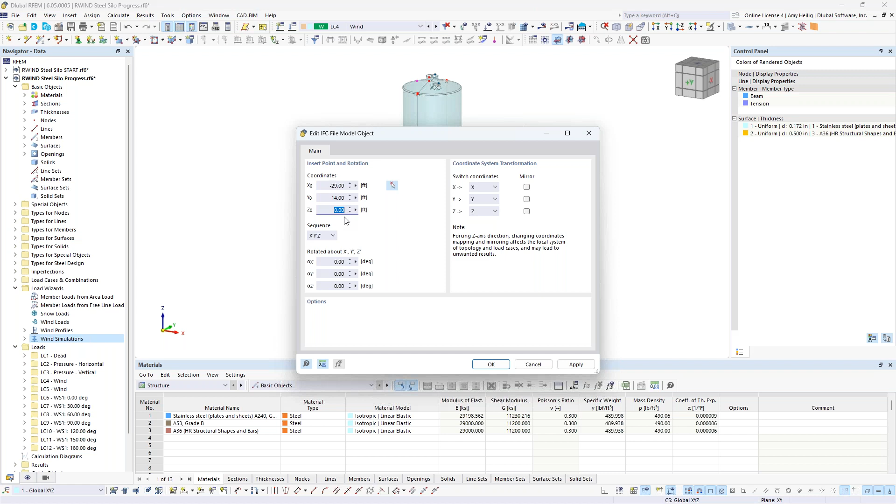I already did this for this example, so we can select the IFC file created from exporting this silo structure. I can either graphically select a point to import the IFC, or input the coordinates directly: -29 in X, 14 in Y, and 0 in Z, which is our elevation. When I click OK, we should see this IFC structure generated.

Now, IFC objects are not anything we're designing here within RFEM. We could right click to convert them into surface models with stiffnesses, materials, and thicknesses, but I'm really just using these objects for the wind analysis only.

And we get a 4th tab here in our navigator where we could quickly turn on and off these IFC objects, but ultimately it's really not going to influence the static analysis and design, only once we get into RWIND. Now I'm going to do the exact same thing here by file importing in that same IFC file. So we go ahead and select it from our saved location on our computer.

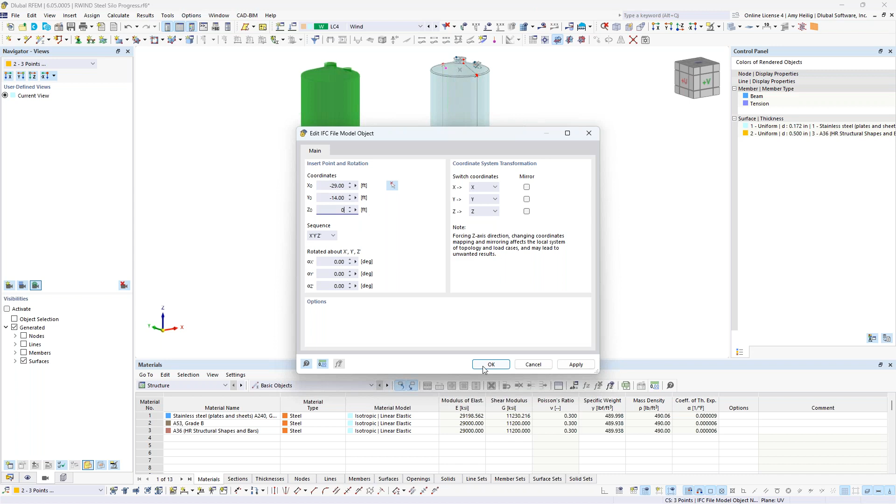And the second coordinate point that I'm going to put in here is again -29, but this time I'm going to modify this to -14 and 0. And I click OK, and what we should see is our additional silo structure. So now we have these closely placed structures adjacent to each other. And when we turn back on our wind flow, again, based on the global x-axis, there's no doubt that the wind flow will certainly be affected in this scenario.

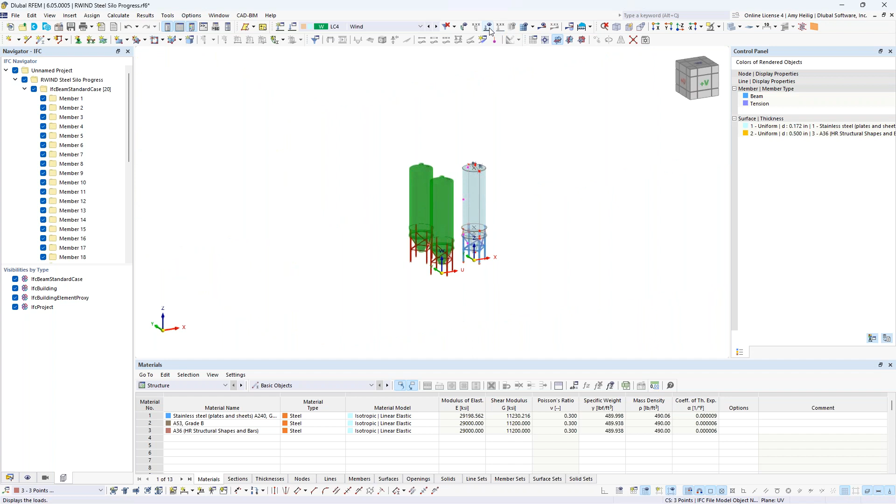So before you export out to RWIND, under the Calculate Mesh settings, it is important here that if you do have these IFC objects you want to take into consideration in RWIND, under this Wind Simulation tab, we do need to activate here the export of all IFC objects, or you could graphically select which ones you would like to export. So that is something that you should take into consideration.

So now that we have taken these IFC objects and inserted them into the RFEM model, before I go into RWIND, I also want to discuss our last major point here, which is the topic of experimental data. So for now, I'm just going to totally hide these IFC objects. They still exist. I just graphically turn them off.

And we will assume that for this particular silo structure we have taken it and run it in a true wind tunnel test, or it could be analytical calculations according to the ASCE, whatever it may be. And we're wanting to compare these results to what RWIND is coming up with. So we can do so within this load case number 4, our original load case.

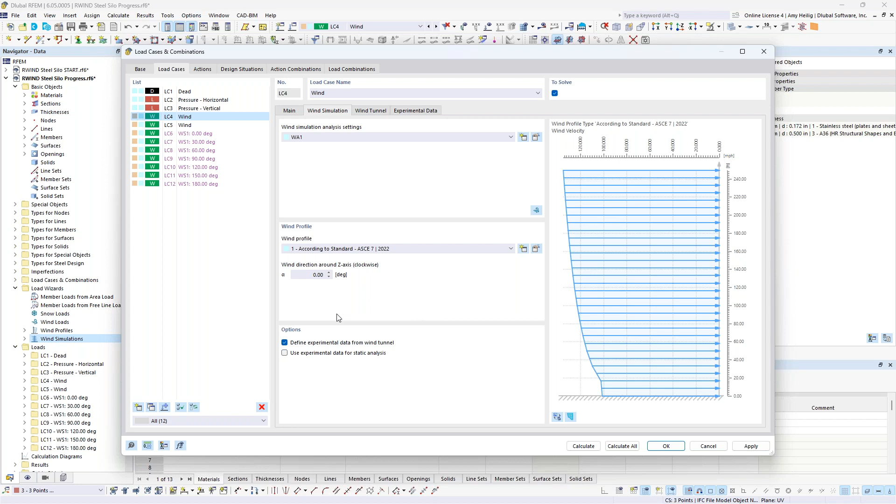Under the wind simulation tab is the option here to define experimental data from the wind tunnel. So when we activate this option, we now get a 4th tab here. And this requires some points to be input where I can compare them ultimately to my experimental data. Now, in order to populate these points, what I would suggest doing is under the types for surfaces, we have this feature here called additional surface result points.

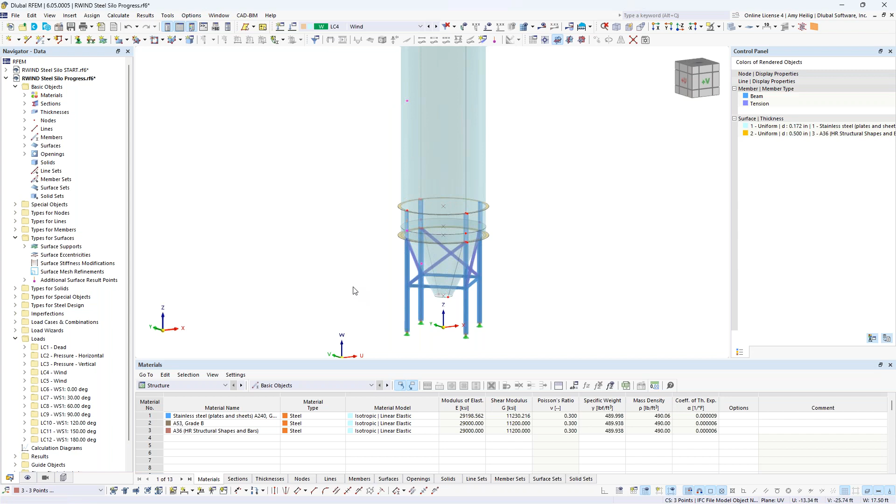And originally with the model, I created some nodes here. For my example today, they're pretty random just for example purposes, but you'll notice that we have a node here along the hopper, kind of at the midpoint. I also put a node here spanning in between my ring beams. I have an additional node here and also one at the top.

So this represents the points that I would like to tell the program to compare in RWIND to my experimental data. Now, in reality, if we have a wind tunnel test or analytical calculations, we would have many, many more points than just these 4 points. But for example purposes today, we'll just use these 4. So under the types for surfaces, additional surface result points, we would right click here to either edit this option or to create a new result point.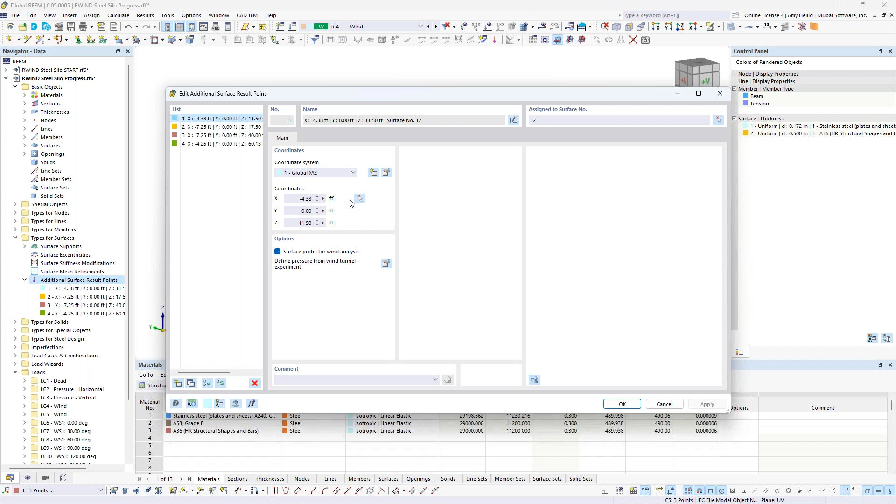Now, I've already taken the liberty to do this, but you can easily create a new point in the lower left-hand corner, and then you can graphically select an existing node here on the structure, or you could input the coordinate points yourself. So I have created these 4 points, again, just graphically selecting the 4 points that I showed you here on the structure. I've also activated this option here, surface probe for wind analysis. So this is important as well.

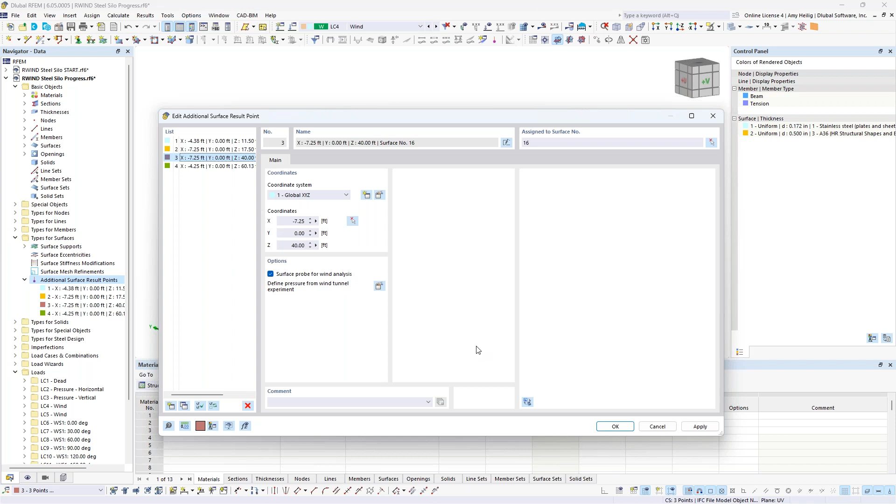So now once we have input this information, what you'll notice here under load case number 4 in my experimental data is that these 4 points are automatically populated. They're exactly what I set back here in the surface result points. But now I want to tell the program, what is my experimental data? What is the pressure that I found outside of something like RWIND, such as a true wind tunnel test or analytical calculations?

So we can begin by setting this first point at the bottom hopper to 10 pounds per square foot. And then the 2 points located along the silo body, we'll set these as 40 pounds per square foot, so 0.04 kips per square foot. And finally, at the roof, this point up here at the top, we will set a small suction force of 0.005.

Again, completely arbitrary, just for example purposes today. We also need to limit these pressures to specific surfaces. So we don't necessarily have to choose just one surface. We can choose multiple surfaces, but in reality, when we have multiple points, these are probably going to be acting on single surfaces. Well, I've already defined this information here with the surface result points. This was a requirement here.

So it's very easy to select these here, hit Control C, select my column cells here, hit Control V just to copy and paste. Now, what else you'll notice is the interpolation methods available here. So the first is the diffusion, which is by default. This is essentially going to distribute data from the source point over the surface. And this is going to interpolate only on one side of a surface. So really good for open type structures like canopies, for example.

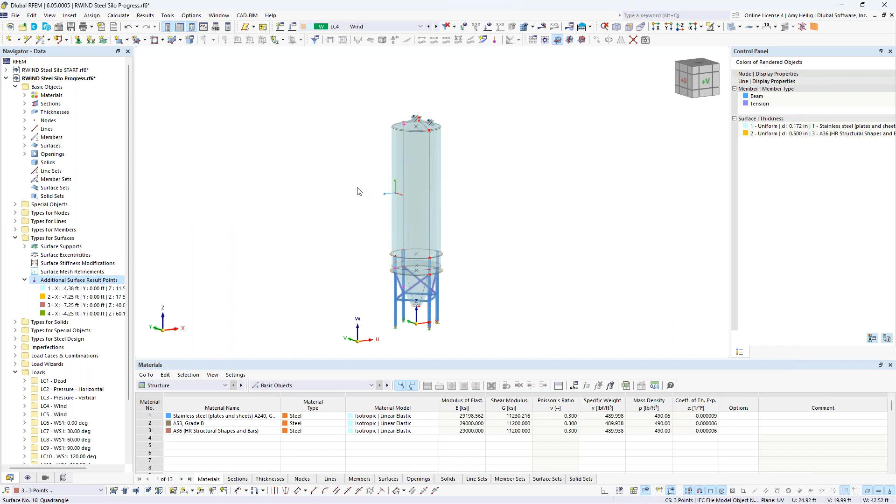So now that we have these points defined, and remember, we still have these IFC objects in the background, we would want to open up the RWIND model by going to Calculate, open RWIND here, but I'm going to open up an already saved model. So we'll go ahead and launch this because I have already carried out this calculation that takes just a couple minutes or so. So what we should see is a very similar structure to before, but this time I would hope that we would see the IFC objects also taken into consideration.

So sure enough, once we open up our RWIND, we now see here our original silo structure that we're interested in, but we also have these IFC objects. And the wind tunnel has been adjusted, everything automatically. So what we would like to do here is to run the calculation. And I've already done so. So under the simulation, I thought it might be interesting just to view how the results slightly differ from our single silo when we have taken into consideration these additional silos out in front. Notice that even for IFC objects, we can view the pressures on these in RWIND, but mainly we're interested in, of course, the pressures of our rear silo structure here.

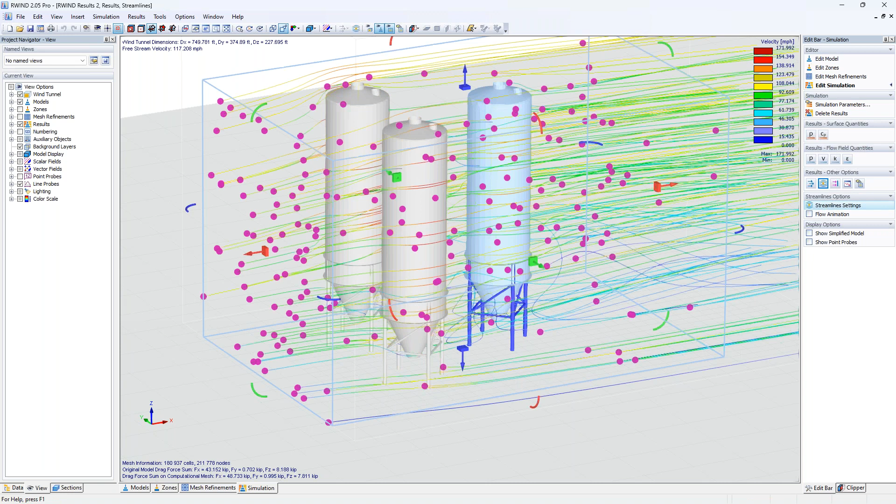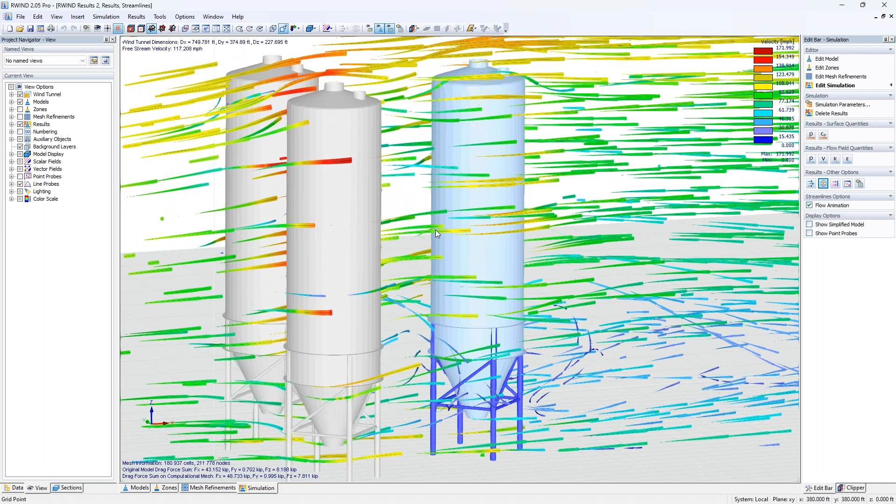If we take a look at the streamlines, we can go ahead and activate these here. And we can make modifications to the streamline settings by graphically maybe narrowing this 3D box here inside these 3 silo structures. Maybe we increase the height. We click OK. We can activate the flow animation here. So now we can see how these particles may be deflected by these front 2 silos. That might increase the pressure here for our rear silo, but perhaps the side pressures decrease due to this deflection as well.

So going back to the pressures here, under the data tab, remember how we have just set those points back in RFEM for the experimental data. These are now inserted here as point probes. So you can see those 4 point probes given to me at those particular locations, and they're available here within my navigator. And under my sections tab, I'm going to go ahead and only activate here the RFEM model so that we don't need to worry about the view of those additional IFC objects. But currently those point probes, again, the same points that we generated in RFEM, are just showing me my pressure from the RWIND analysis.

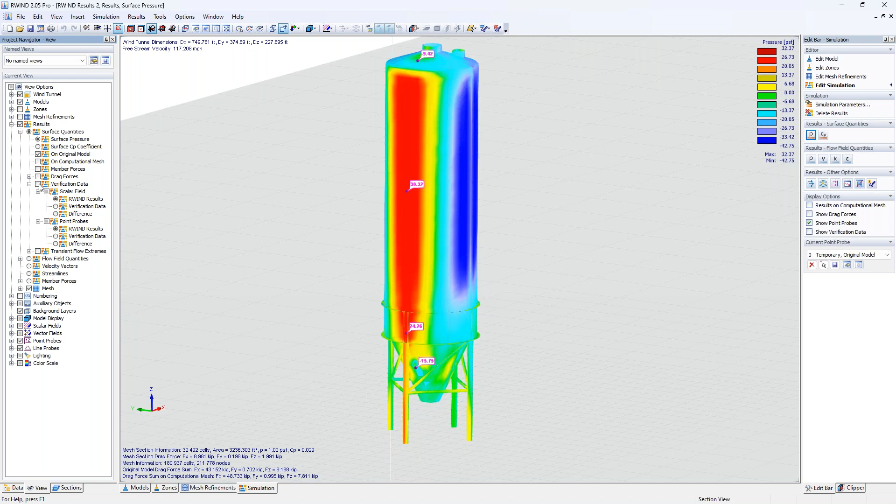But now under the View tab, we can expand here the results, and under Surface Quantities, Verification Data, we have the additional options here to activate the verification data for the verification points that we have set within RFEM. So this should look much more simplified. Notice we have 10 pounds per square foot, 40 pounds per square foot for the body, and that 5 pounds of uplift up at the top.

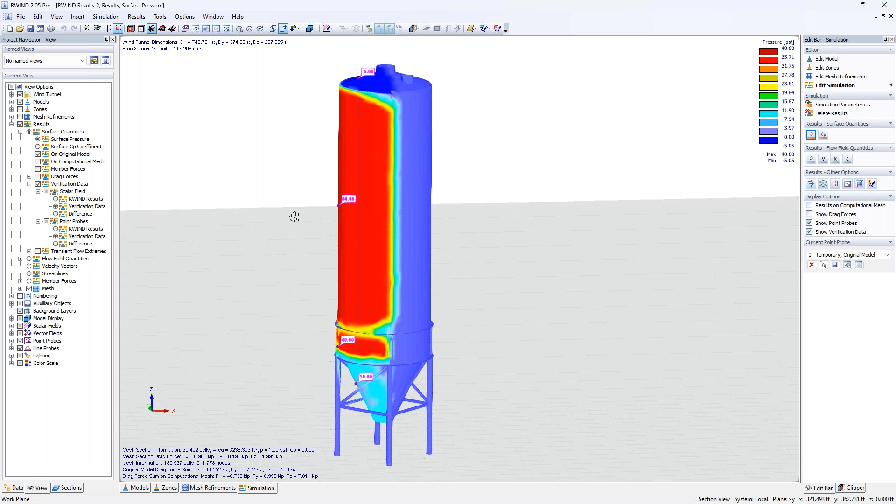Again, in reality, we would have many more points here, but the program is going to transition from that experimental data that it's given, and we have 0 set for the rest of these points. So going back here to the data tab, what I'd like to point out is that if we double click on these point probes, we have the same options available here to modify these interpolation methods.

So this is the same information we saw in RFEM. Notice that my radius is set at 20 feet. Well, I could set this here if I'm interested to something much smaller, like 2 feet. So I click OK and I click Apply. So now you can see what I mean here, that if we set this radius to something much smaller, we're only going to be interpolating the experimental data over this very small area. So that's why I set it to something extremely large, such as 20 feet, to cover this entire surface.

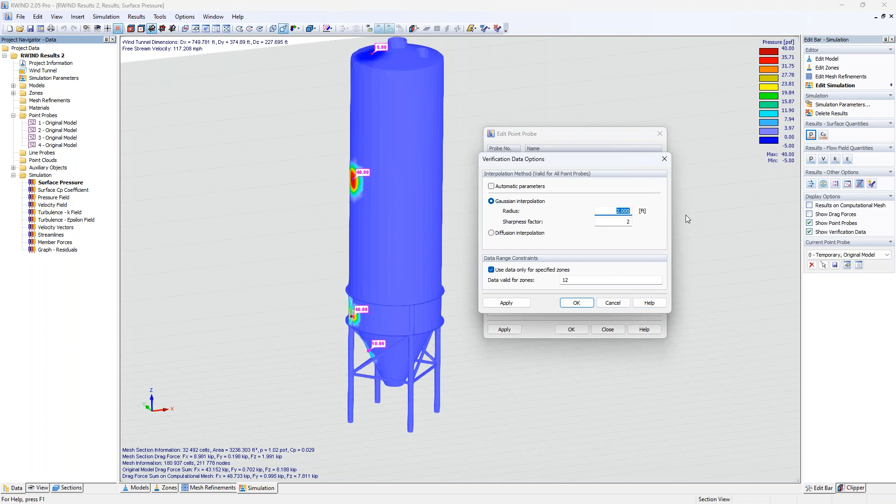If we have multiple points, though, we probably do want to use something much smaller so that the program can use that shrink wrap mesh and interpolate between that experimental data. So going back here to the 20-foot radius, and I click OK, we should see that change. Back under the View tab, what we can see here is the actual difference now between the RWIND results versus my experimental data with these point probes.

So this magnitude that's now shown here with these point probes is showing me the pressure difference in those 2 methods. So this, again, can be really interesting for us in comparing the RWIND results very quickly, very easily to something like a true wind tunnel test or analytical calculations.

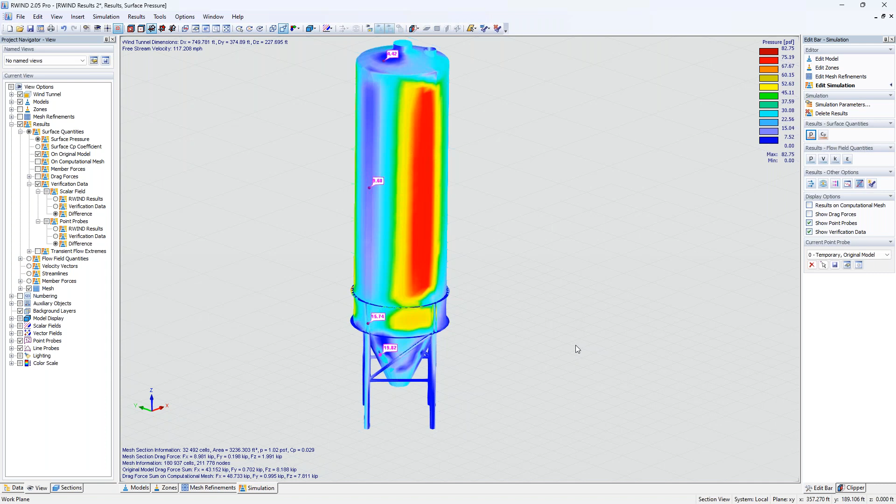Now, exiting back out of RWIND and we go back into RFEM here, the final thing that I just wanted to point out is this last feature to use the experimental data for the static analysis. So if I am not interested at all in using my RWIND wind pressures that we've calculated with that CFD analysis, rather I want to use the experimental data for my static analysis, we could do so with this checkbox here. We still have to carry out the RWIND analysis.

The reason why is because we use that shrink wrap mesh to interpolate between all these experimental data points, just as I showed you within RWIND. So again, the calculation is still needed, but the results of RWIND are no longer important because we're purely going to refer to this experimental data here within the RFEM calculation. So just something I wanted to point out further.